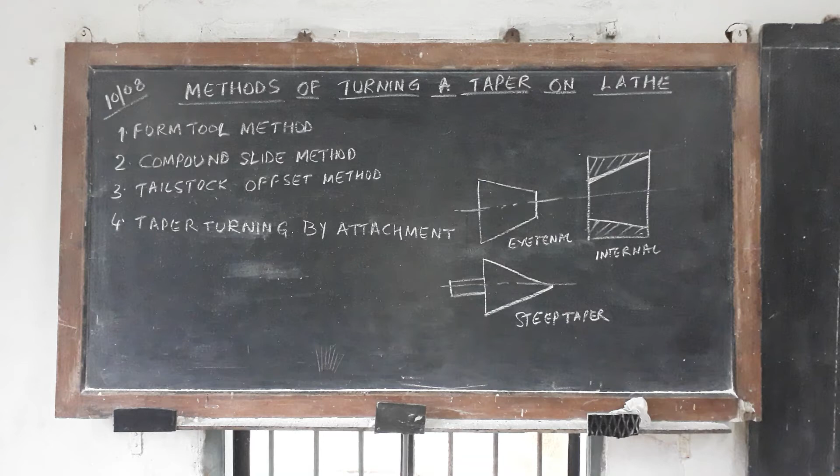Good morning, students. Today we will see about methods of turning a taper on a lathe.

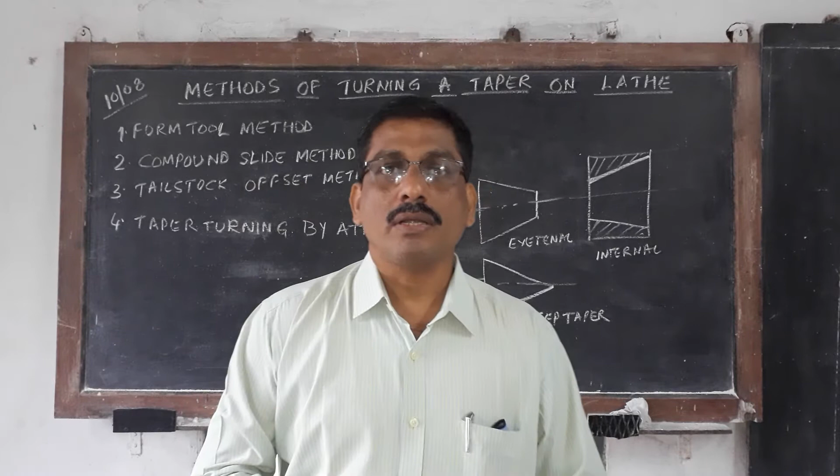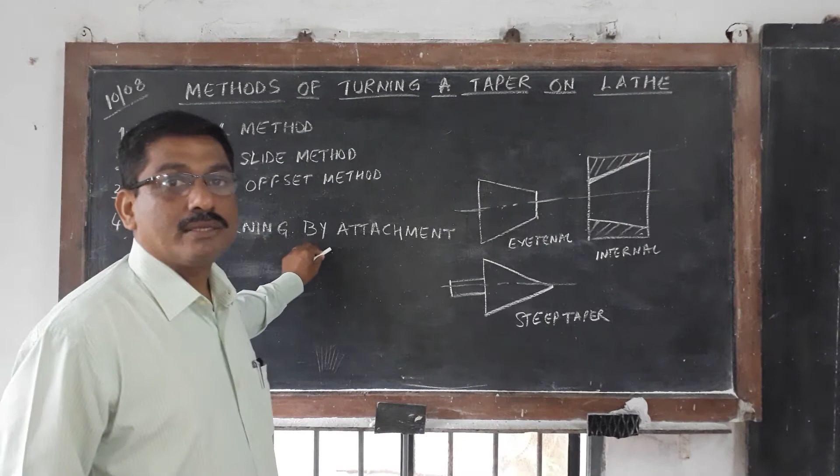Methods. There are four methods of turning a taper on a lathe. First one is the form tool method. Second one is the compound slide method. Third one, tailstock offset method. And fourth one, taper turning by attachment. So these are the four methods to turn a taper on the job in a lathe.

So first we will see now about form tool. Form tool is the simplest method of turning a taper. This is used in mass production work, but it is limited to very small tapers. In mass production work, we need only just a taper, and here accuracy is not a criterion. So exactly 45 degrees is not required, because mass production

means, suppose you are doing about 100 bolts. For all the bolts, threading means always a chamfer is necessary. So when you do 100 bolts, what will you do? You will prepare just one form tool. Now this is your raw material.

This tool we grind. And this tool will be directly fed at right angles to the axis of the lathe, and this chamfer can be formed over the job. That's enough. So here the length of the taper, depth, angle, it is all not so important, but only the chamfer is required, because threading always requires a chamfer.

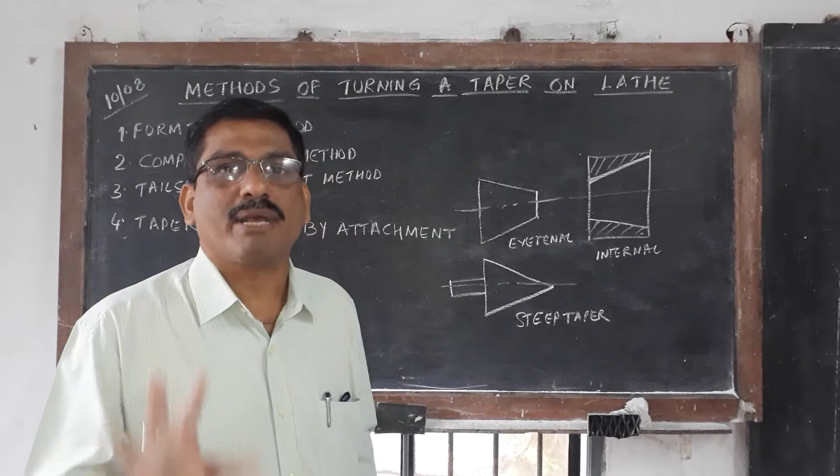So next we will see about the compound slide method. In this video only I will explain the compound slide method and two examples. The tailstock offset I will show you in the next video. Okay.

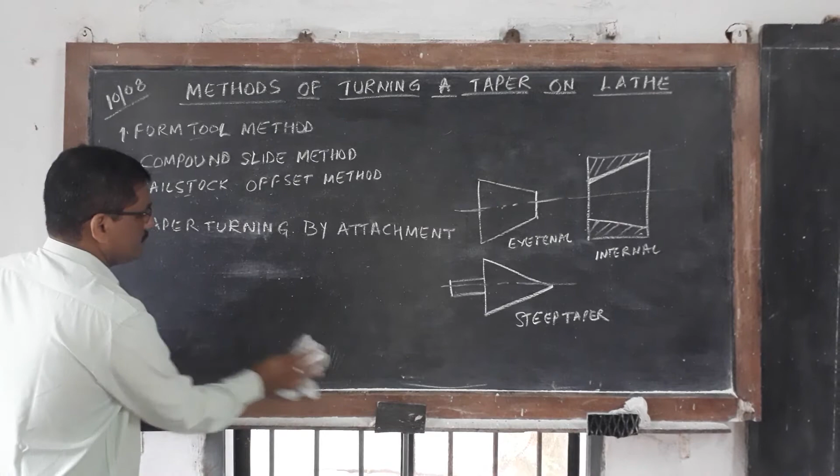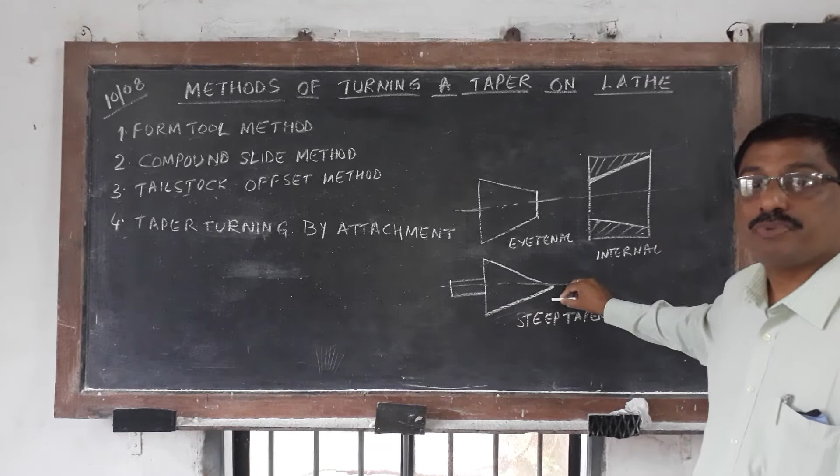So here in this compound slide method, you can turn an external taper, as well as an internal taper, as well as a steep taper. Suppose we are going to prepare a live center. In the lathe, when you turn the job between centers, on one side you have to prepare a center. You will come to know when you do it practically.

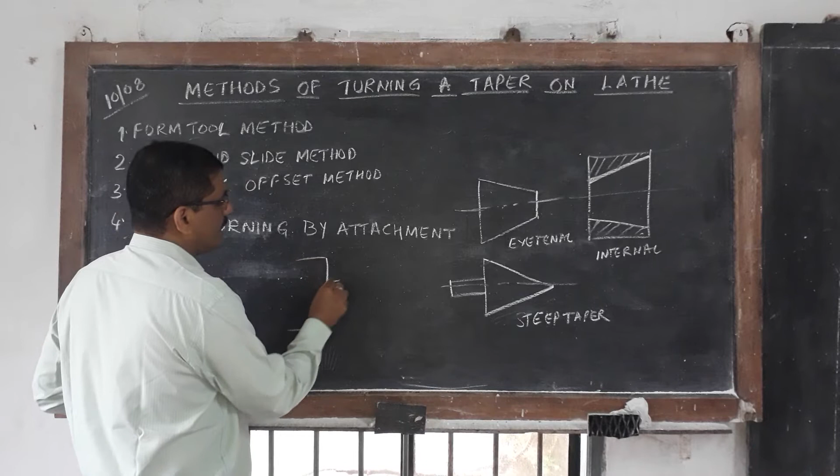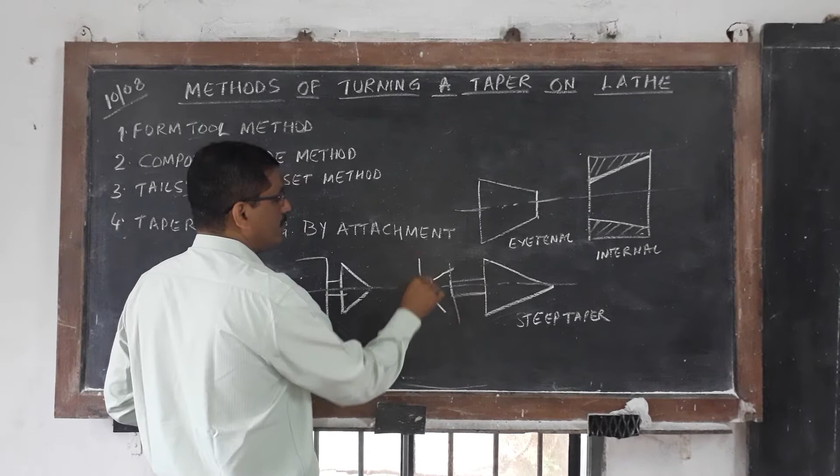So here, between centers in the sense, suppose this is your shaft. Here one center we are going to fix. Another side will be your tailstock center. Between these the job will come. This is called between centers. So at that time you have to prepare a center. Usually the center

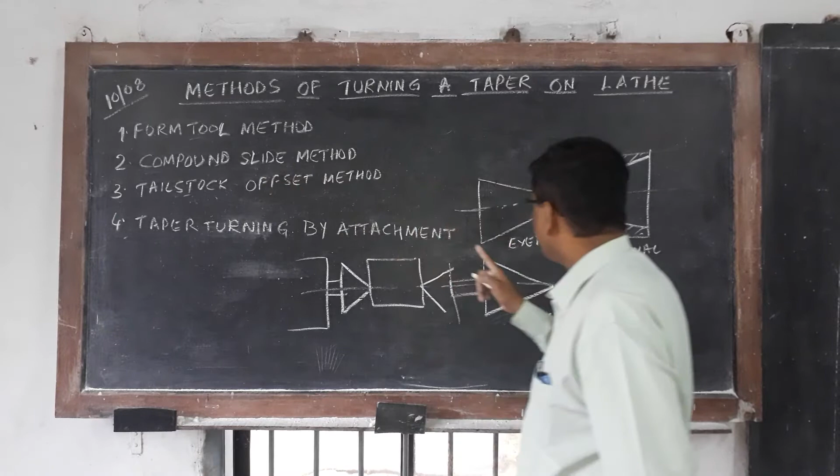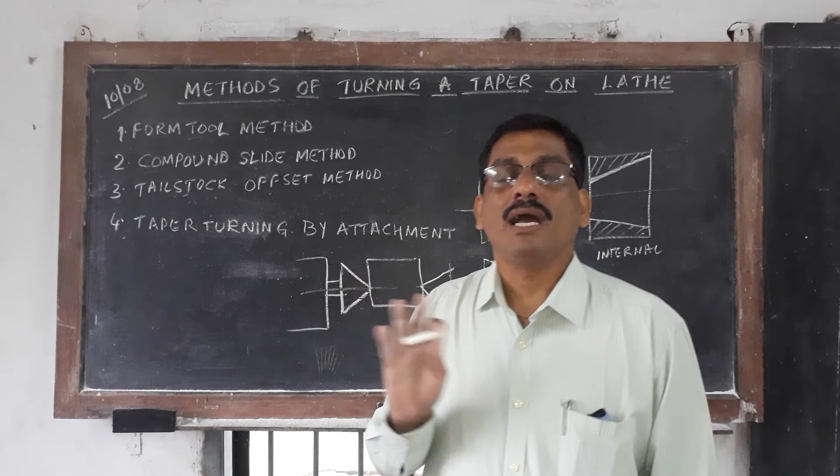angle is 60 degrees. So that way by the compound slide method you can do an external taper as well as internal, as well as a steep taper. But the disadvantage here is you can only give a hand feed. Automatic feed cannot be given by the compound slide method. Another disadvantage is that you cannot do threading on the taper portion. Suppose you want a thread on a taper job, it is not possible.

And one more thing, your compound slide has a limitation. You can move the compound slide only about 50 mm, 60 mm, or maximum 100 mm. So whatever length is possible to move by the compound slide, only that length can be turned. More than that is not possible. So these are the three disadvantages of the compound slide method.

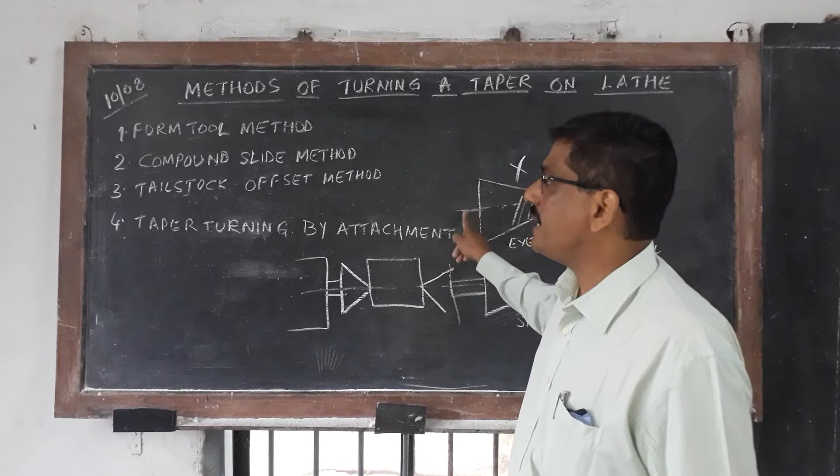So today we will see only the compound slide method, but for this there is a calculation you have to do. So we'll see the calculation now.

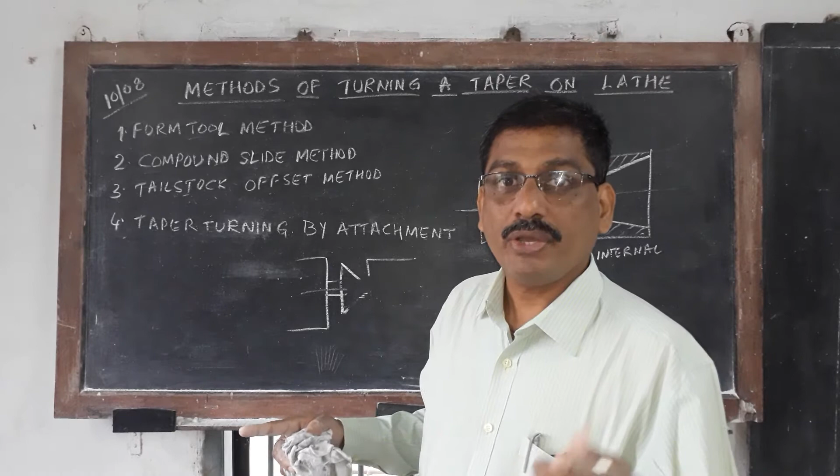This I will show you tomorrow. Already I sent you a video, that video you see. Taper turning attachment, and the tailstock offset method, tailstock offset method, for long tapers. That generally I will explain.

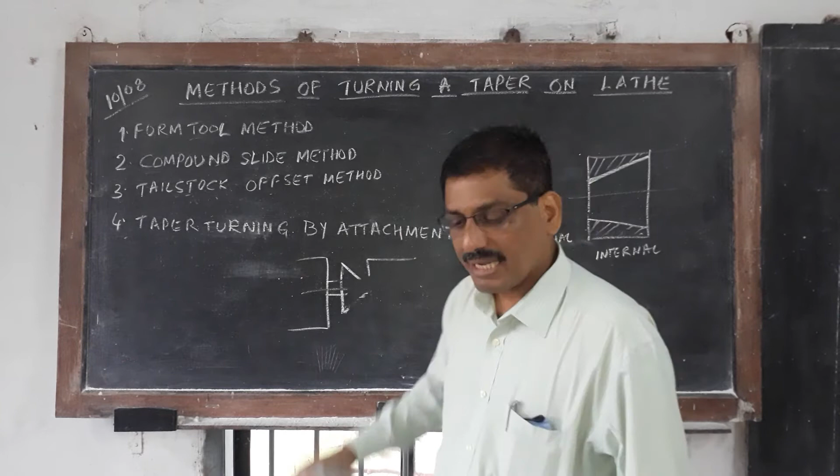Now, by the tailstock offset method in the sense, where your axis is. Now suppose this is the job.

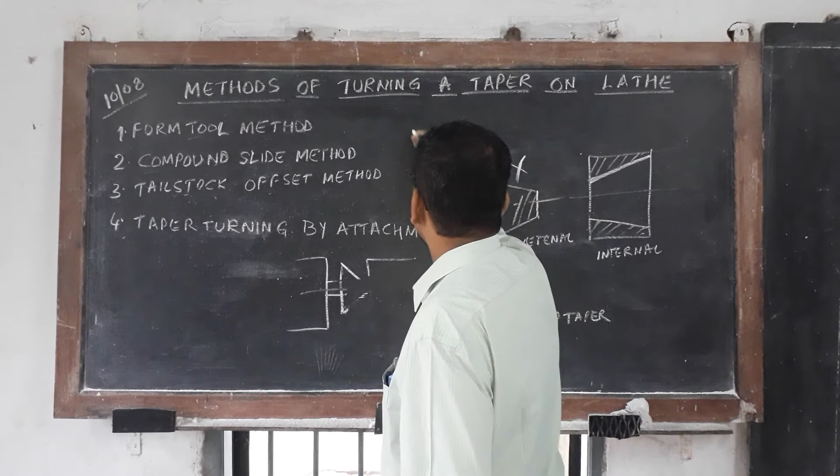Okay, this is your job. This is the axis. Here the job is held between centers only, otherwise it is not possible. When you turn the job between centers with the tailstock offset method, you have to hold the job between centers only, otherwise it is not possible. Okay. It is just supported by the centers. Here the lathe dog will be put. Okay, the lathe carrier will be put.

Here your tailstock center is there. So what you are going to do is the tailstock offset. If you see your tailstock from the back side, this is the base. This is the body. Here there is one mark. So this body is there. Now that body can be shifted. The base will be as it is. This body can be shifted to this side, or else you can shift it to this side also. That is actually the offset.

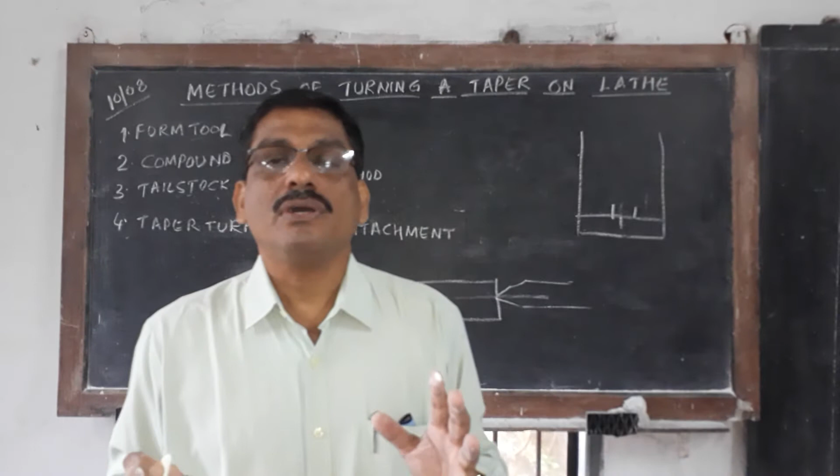So it is coming in mm. The maximum offset possible is 1/5 of the length of the job. So usually it is coming 4 mm, 5 mm. On a bigger lathe it will come a little bit more. If you see now an HMT, it will come maximum 4 mm. That's enough, not more than that. So this is the offset method.

So what I will do, the axis of the job itself we are going to shift. See, now your tailstock is shifted 4 mm. So here the advantage is the job is shifted, so you can give the automatic feed. Only the job you are going to shift. So here you can give automatic feed. You can do the threading.

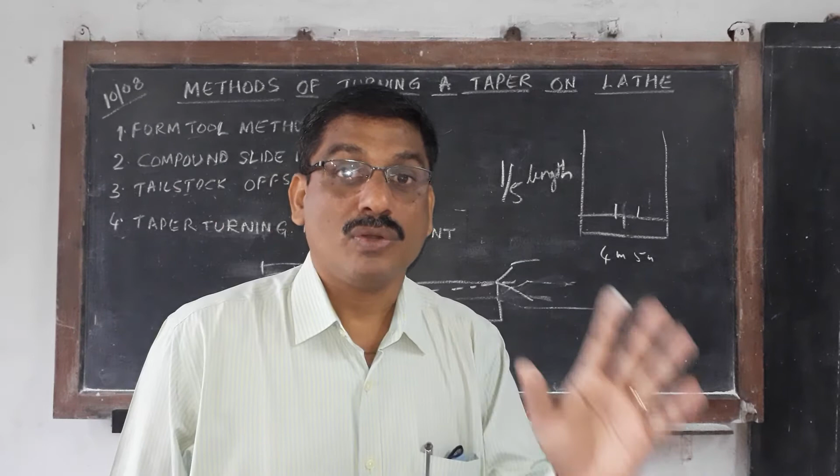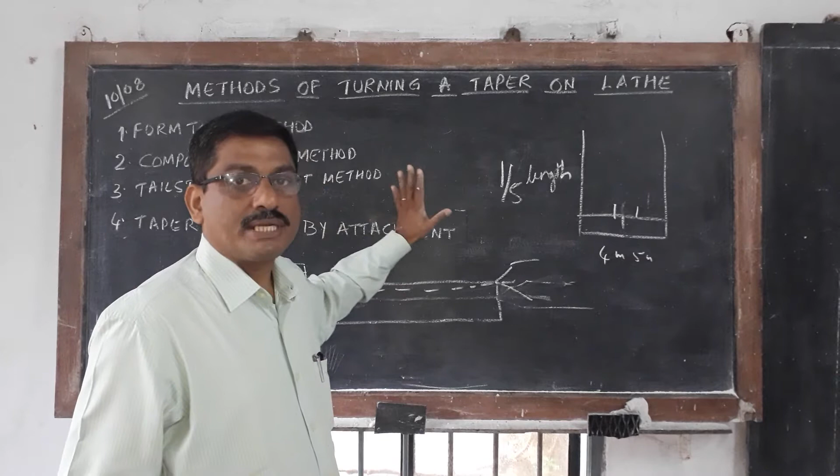But it is only for external, not internal. Internal it is not possible. So automatic feed can be given, so you will get a smooth finish, like turning. Then threading is possible in the tailstock offset method. For that also there is a calculation. That calculation I will show you in tomorrow's video. Generally I will explain.

Now, better than that, there is one more: taper turning by an attachment. This video I sent you, just see how much you can understand, it is enough. So attachment means your cross slide is there, and you are moving the cross slide by a screw, isn't it? When you fix this attachment, you have to disconnect that box nut. There is no connection with the box nut.

So that cross slide is connected to the attachment. So here one more advantage is, your tool itself is going at an angle. The job is straight. So when you give the feed, your tool is moving like this, taper. That's why you are getting the taper on the job.

So the advantages here are the same. You can give a smooth automatic feed. You can do the external thread. One more thing in this, you can do internal threads also. That is more important. Internal taper as well as internal threading are possible by the taper turning attachment.

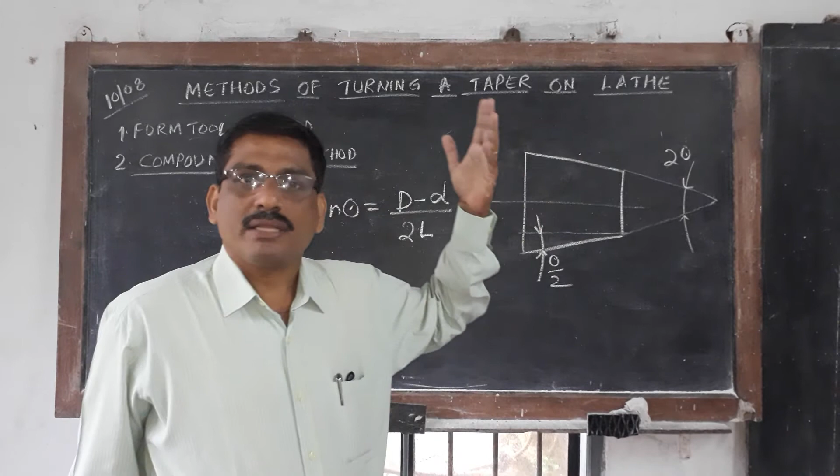But you can tilt 30, 40 degrees, that is all possible. 40, 60 degrees is possible. So whatever angle you are calculating, that can be tilted in the compound slide, and by hand feed you can do the taper.

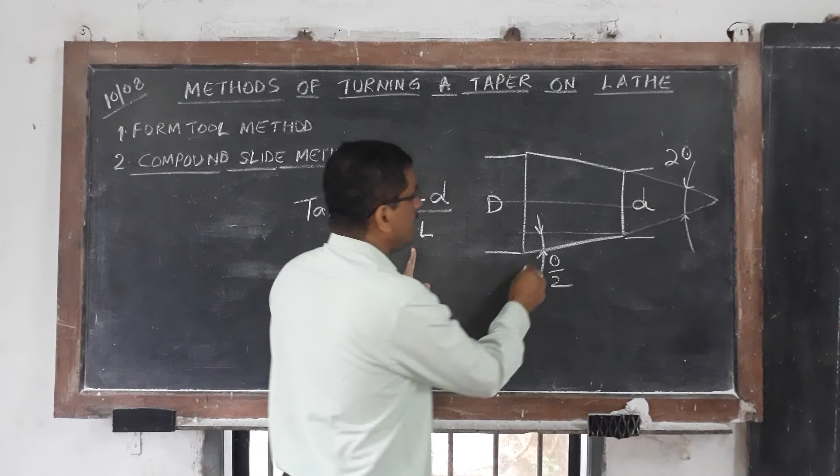So the formula is tan theta is equal to D minus d divided by 2L, where capital D is this diameter, the bigger diameter. Small d is the smaller diameter, and 2 is required because here one length is there and here one length is there. That's why it is taken 2, and L is the length of the taper, not the full job.

So D is the bigger diameter, small d is the small diameter, and L is the length of the taper. So one example I will do. Then I will send you notes, in that two more examples will be there. So that is enough. You calculate.

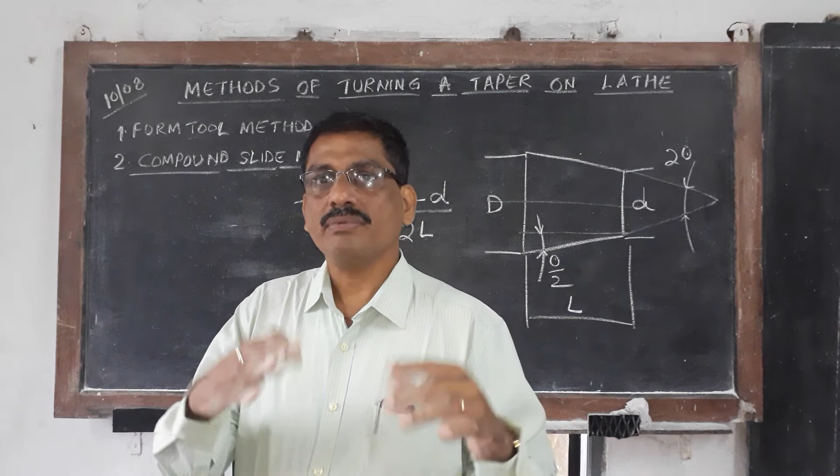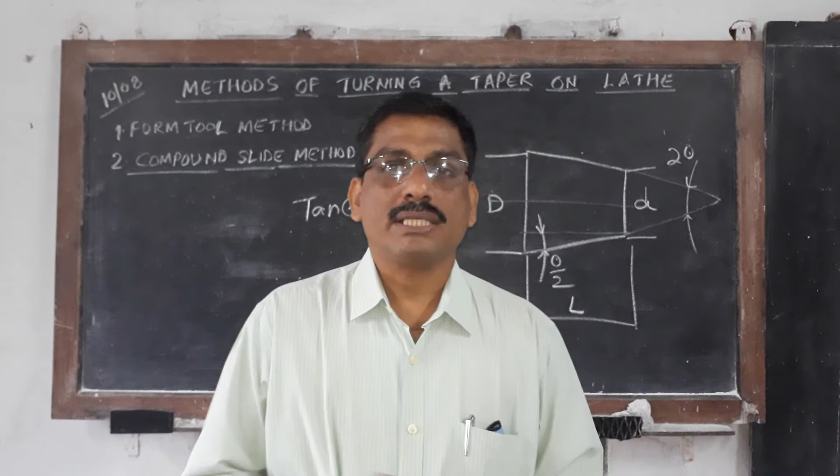Now actually you have to do the center punch exercise. Actually you had to do it by hand, but because of corona, now we will do it on the lathe itself. Because in the center punch, if you see, there are two tapers. Here one taper is there.

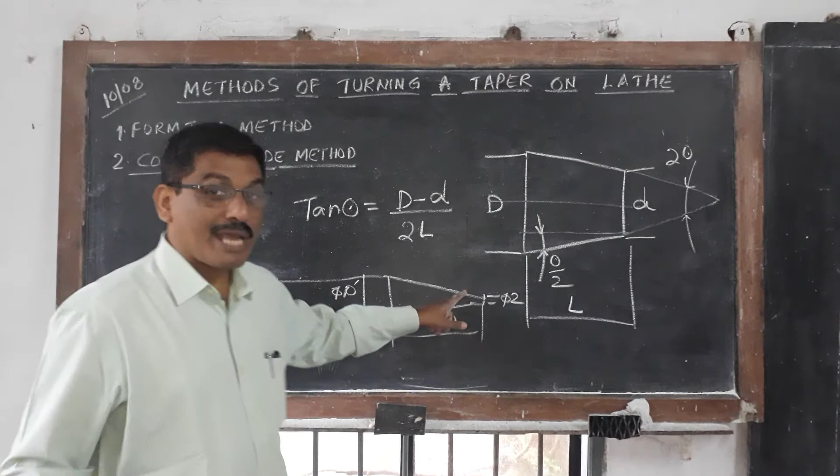So this is the sharp point. Here we will make dia 2, and this will be dia 10, and the length of the taper will be 40. For this, you calculate yourself. The drawing I will send in the WhatsApp. You calculate yourself and write it in the note, and directly you can do it on the lathe. This is easy. Filing will take a lot of time, isn't it? Directly you can do it on the lathe.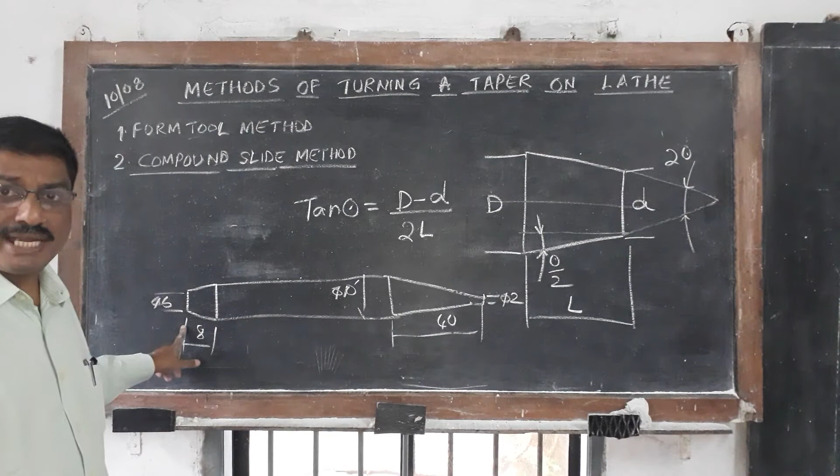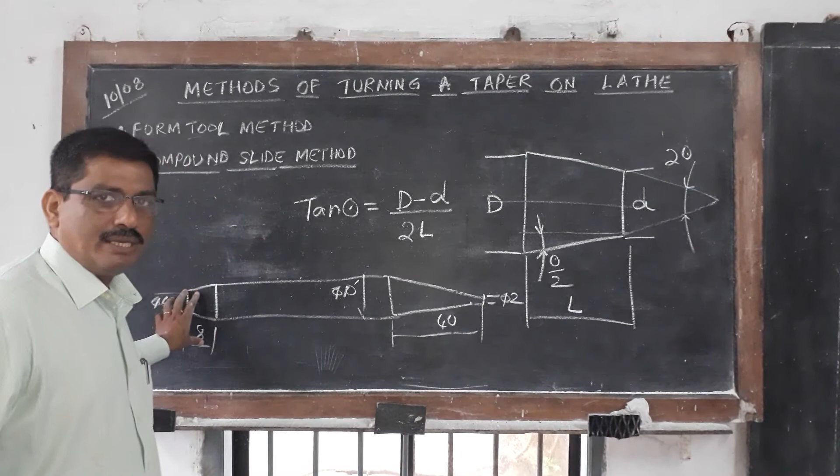In the center punch, here also there is a taper on the back side, a small taper. Here dia 6 you have to do, and this length is 8 mm. The back side, what is that for? Because when you are hammering the punch, it is going to bulge, isn't it? So that's why a taper will always be given.

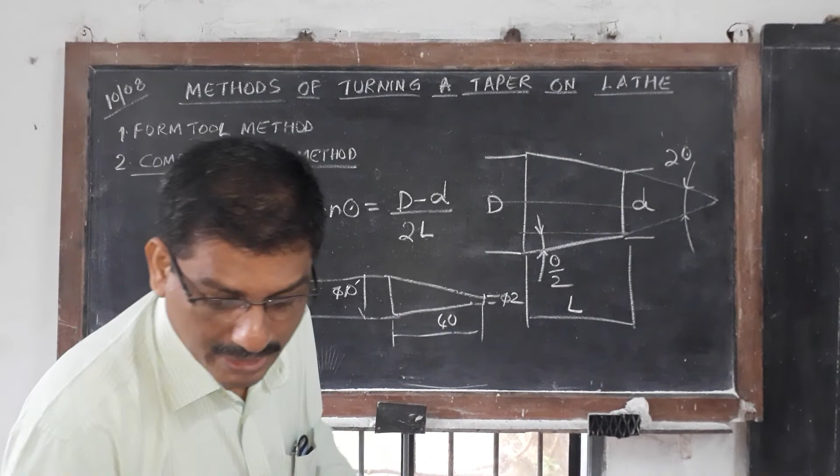So that drawing I will send in the WhatsApp, and you calculate yourself what angle is required. So here one example we will do. Same drawing only, I will draw.

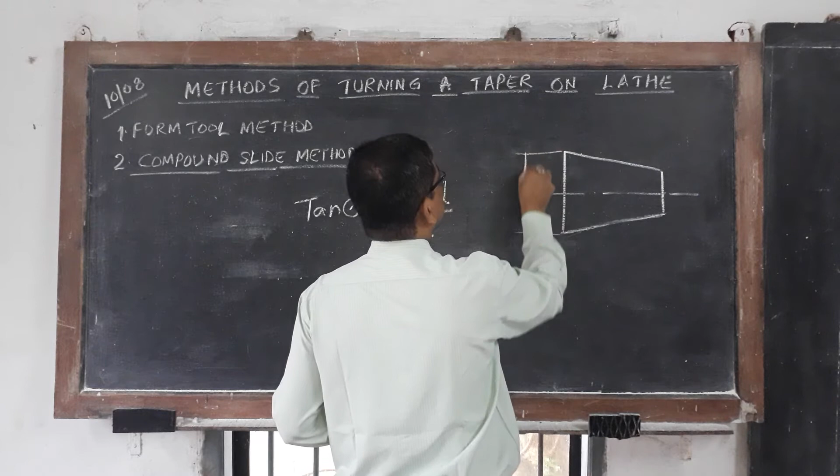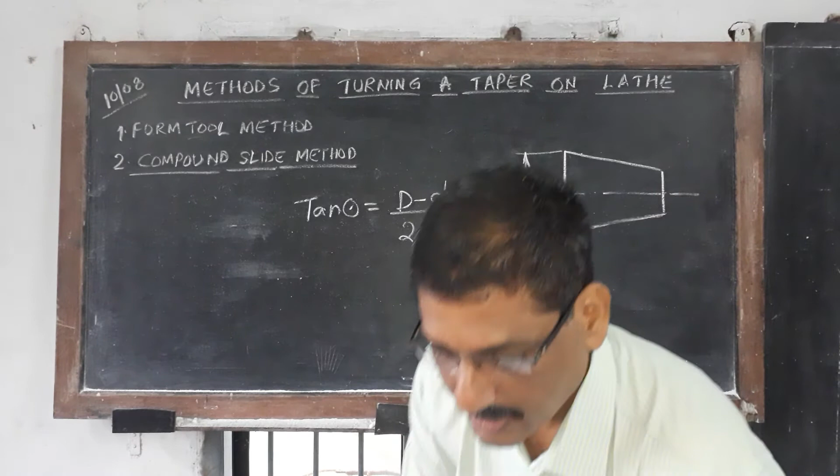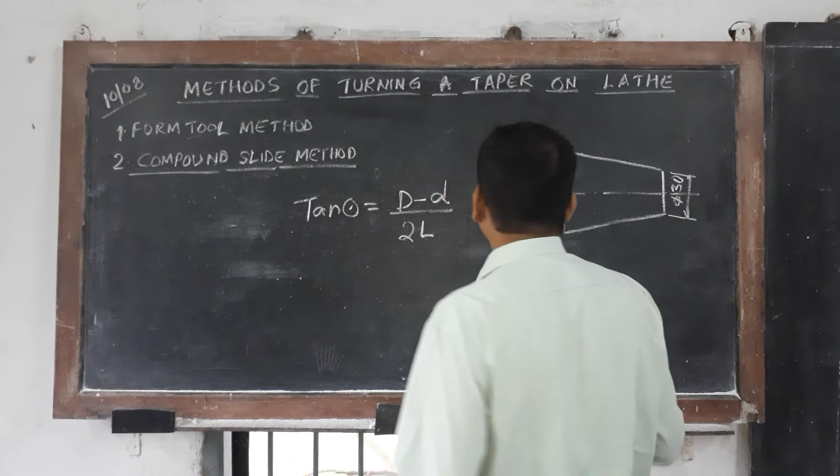So this is, you all draw nicely. I am drawing roughly a dia 40. This is dia 40 and the smaller diameter we will take dia 30. Then we will take the length of the taper 50 mm.

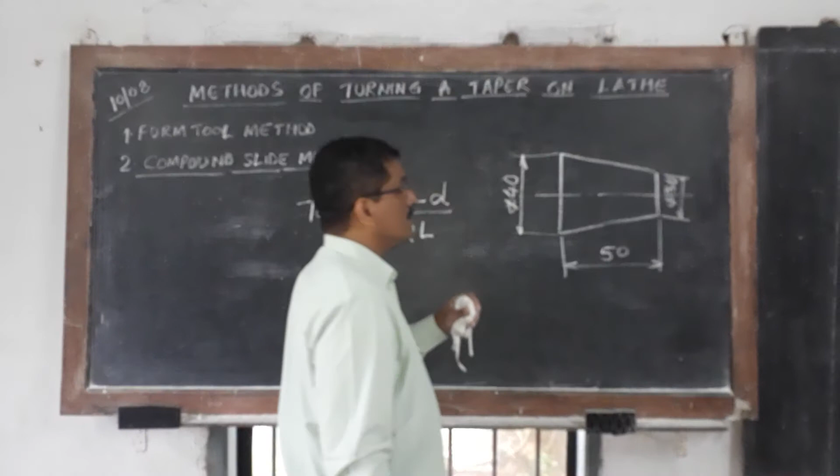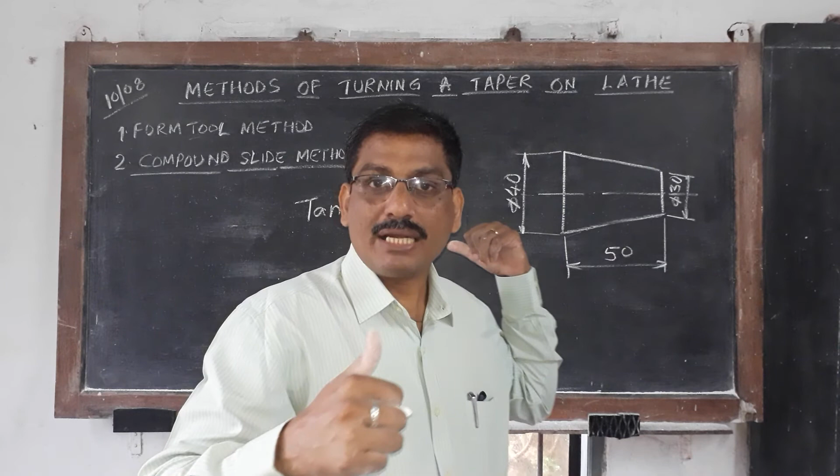So now we will find what angle you need to tilt the compound slide. If you tilt that angle, you will get exactly this 30 dia and exactly 40 dia over a length of 50 mm. This length you have to maintain, 50 mm.

So we will substitute this in the formula. Capital D 40 minus small d 30 divided by 2 into length 50. So it becomes 10 divided by 100, which is nothing but 0.1.

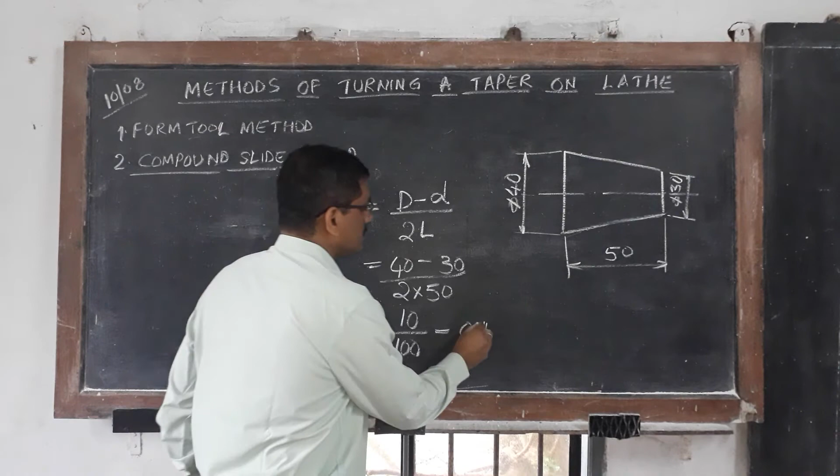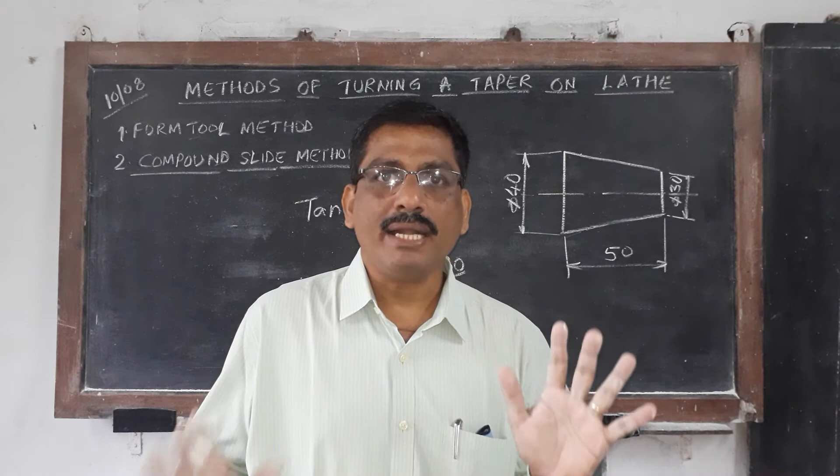So now we have to go to the trigonometric table, but now you have a calculator, isn't it? If you have a scientific calculator, you can directly find it. So what you have to see is which angle has tan equal to 0.1.

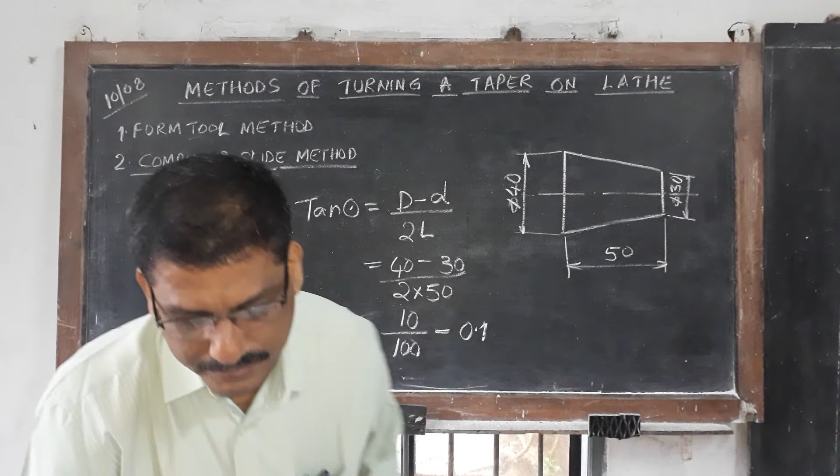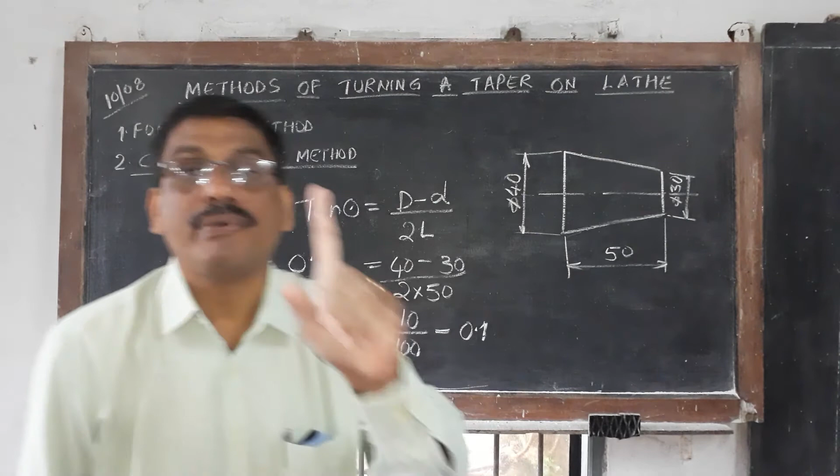Tan theta is equal to 0.1. Now theta is equal to, okay, tan theta is equal to 0.1 you are getting. So for this, I will write directly the answer. So you will get 5 degrees 43 minutes. So this is the answer.

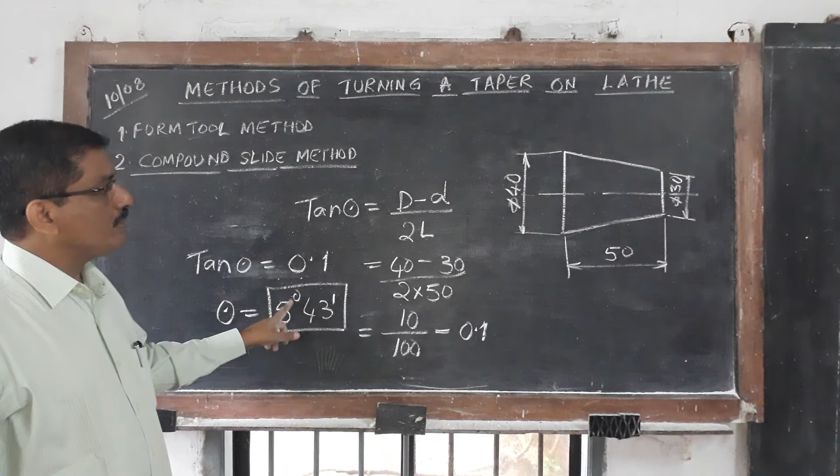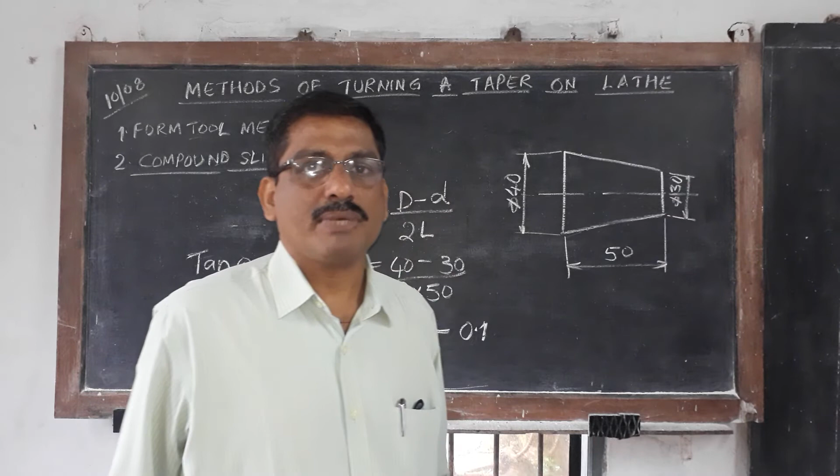So if you tilt your compound slide to the 5, this is approximately, you can tilt, no problem. 5 degrees 43 minutes, nearly it is coming 6 degrees. Slightly you adjust, nearly it is coming close to 6 degrees. So set 5 and apply that trial, but a little 0.1 difference, it won't affect much. So this is the 5 degrees 43 minutes you have to set. So this is the formula.

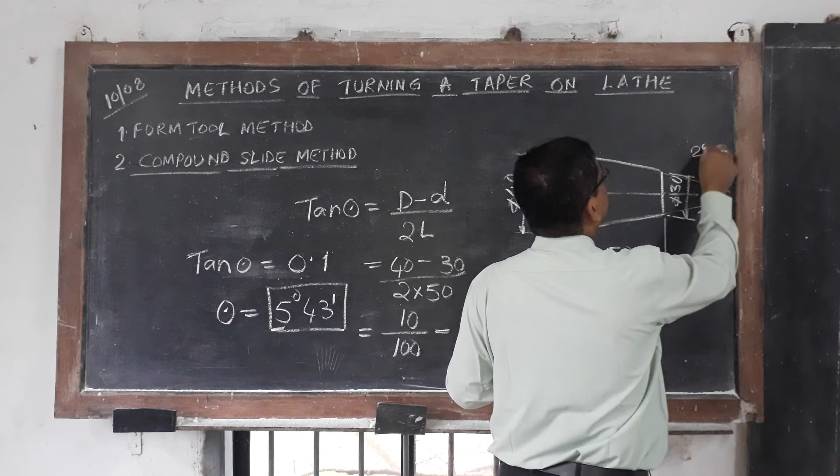So like that you may be knowing the angle. Now you know the angle, 20 degrees. Included angle 20 degrees, you are knowing. So now suppose you need to know the bigger diameter, because you have to take the raw material, isn't it? So that is also possible.

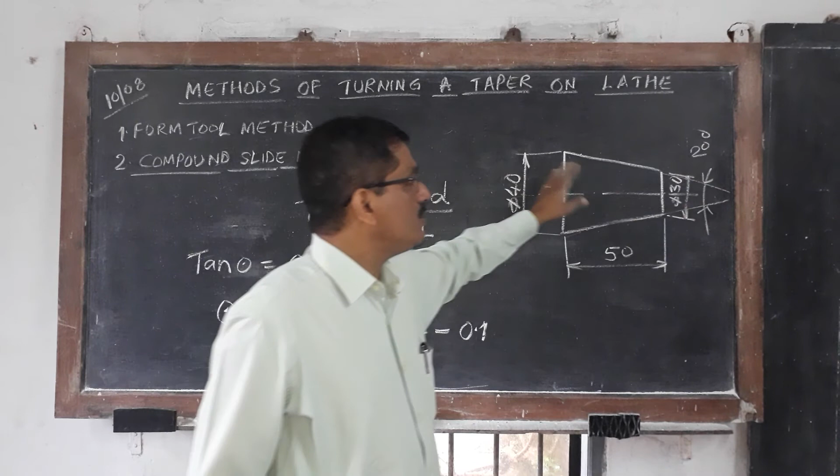So you can interchange, you can substitute the value. So try yourself, I am not telling you. You will get the bigger diameter. So that raw material you have to take, then you have to do the turning like that. So this is only about this today.

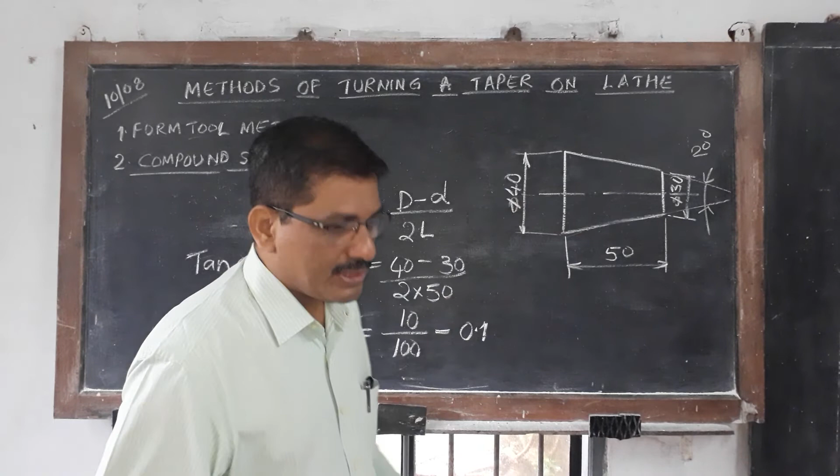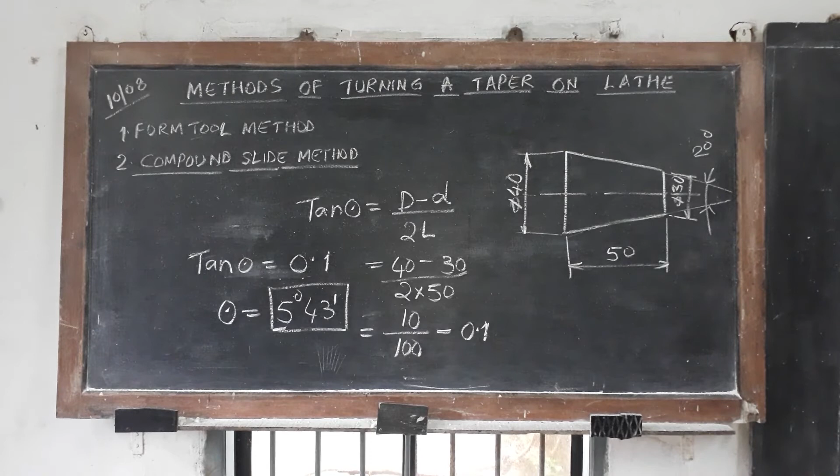One minute. Okay, one more example if you want, I will do.

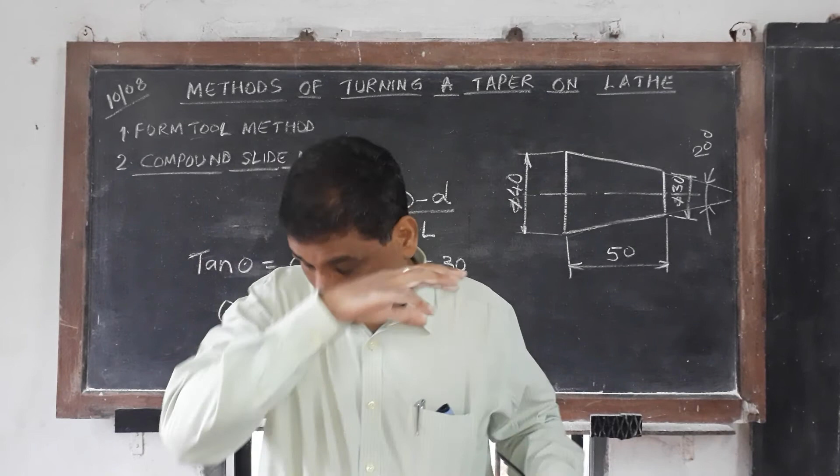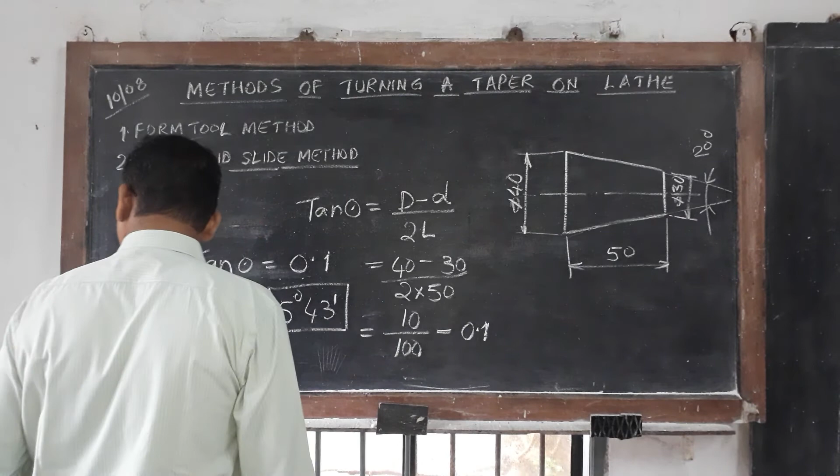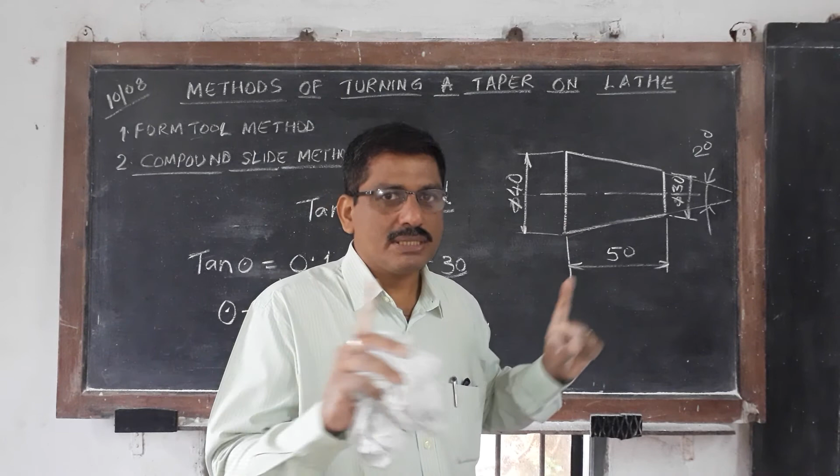But here, the only thing is too lengthy a taper, about 100 mm, 200 mm, is not possible. Because it is a limitation of your compound slide; whatever length is possible, only that much you can do.

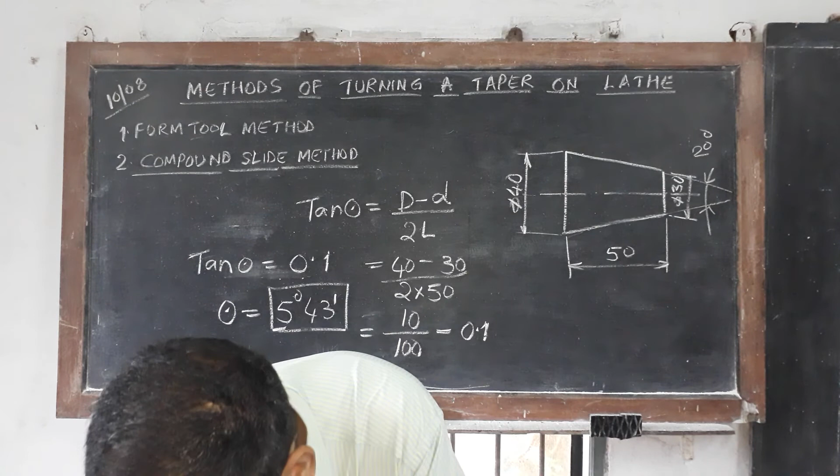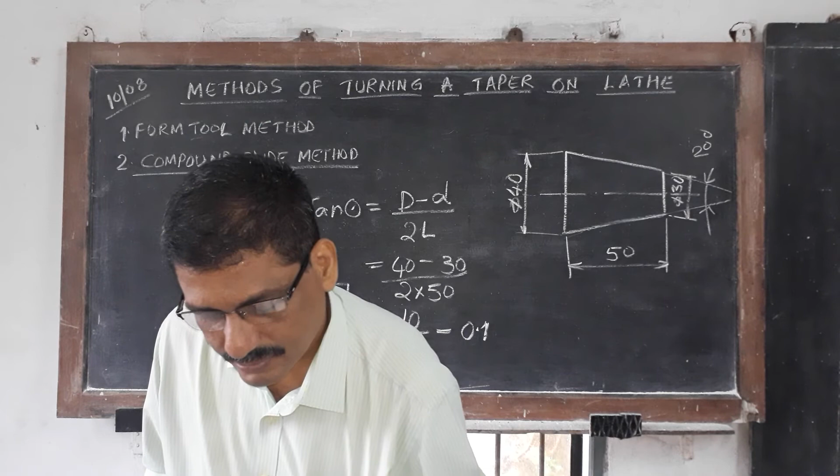Okay, now one for the center, one center we will find. Now suppose you want to prepare a live center. The calculation answer you have to find. This is the raw material; a step is always required when you hold it in the lathe. Now this angle is 60.

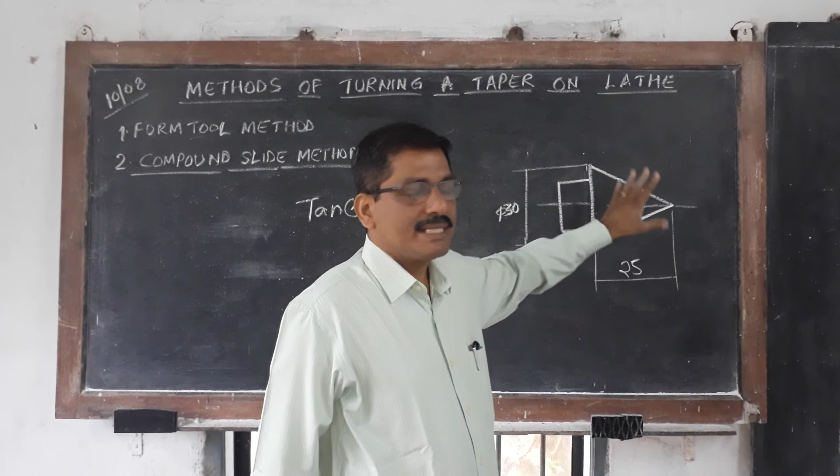So usually the center length will take about 30. I am giving only this one; you calculate yourself, the answer you have to find out. So this is about 25 mm. This will take about 30. Now you calculate the angle. The angle for this center, if you find it, we will get 60. So what diameter do we have to get? We have to see.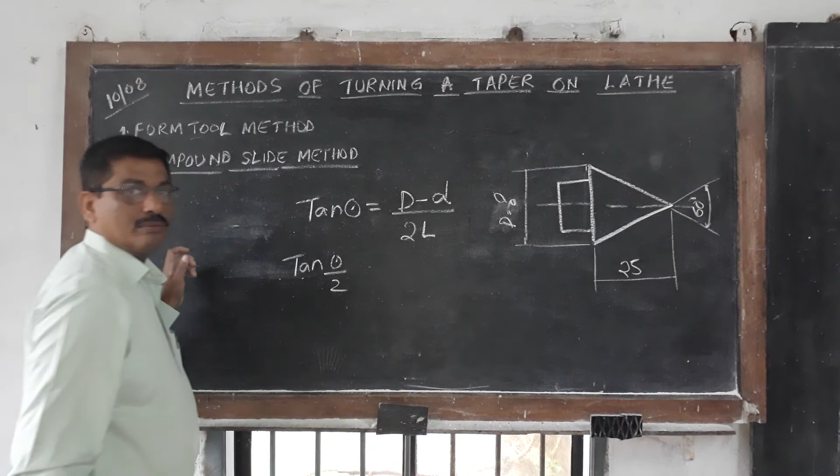This diameter, we find the bigger diameter. D is equal to how much? That you have to find out. So this angle I will give 60 degrees. Now it is 60 degrees, it is an included angle. So here you have to take tan theta by 2. It is the half included angle, not the full angle.

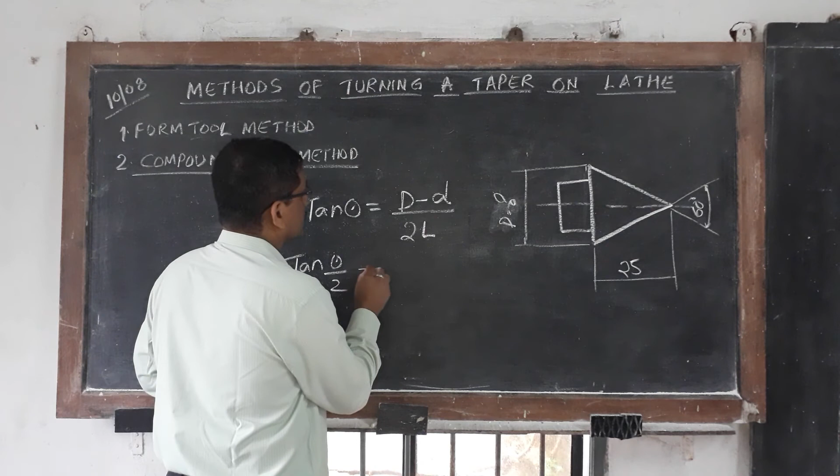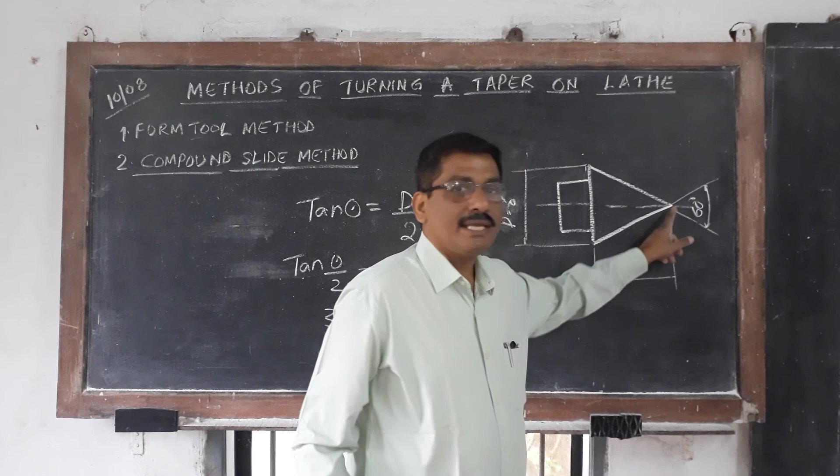So here, tan theta by 2 is equal to D minus small d divided by 2 into 25. Now tan theta by 2 means tan 30 degrees is equal to D minus small d. Small d you have to take as 0, because we are getting the sharp point. So small d is 0, divided by 50. So now you have to work this out.

You work it out at home and send the answer to me in WhatsApp. I will not tell. This 50, and for tan 30 use the log table or your calculator. Tan 30, the answer will come something; that you have to see. Then compute, divide and get the answer. It is homework for you. Send the answer to me in WhatsApp.

Got it? Then we will see the tailstock offset method. That we will see tomorrow. Okay, thank you.